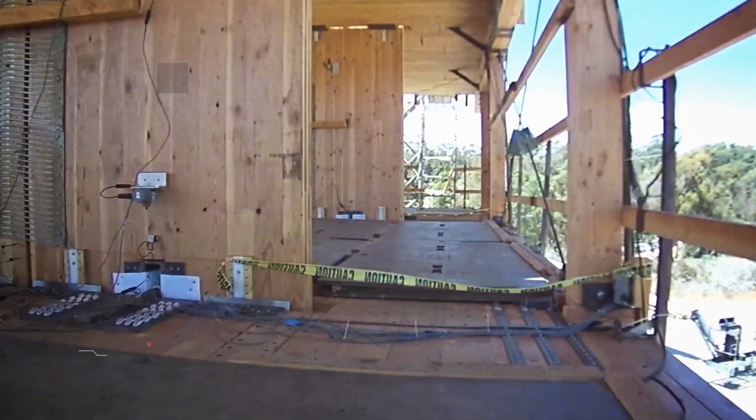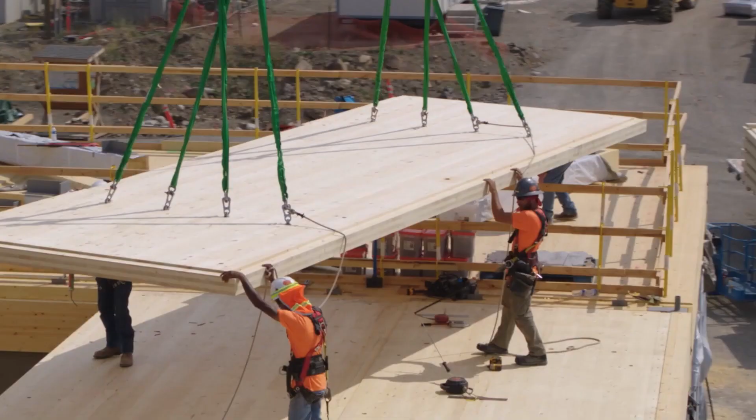Wood is an amazing construction material. It is light and strong and easy to work with. Cross-laminated timber, or CLT, takes these natural advantages and enhances them, allowing us to construct buildings that were traditionally dominated by concrete. And despite some outdated misconceptions about the safety of building with wood, CLT is predictable, safe, and reliable.

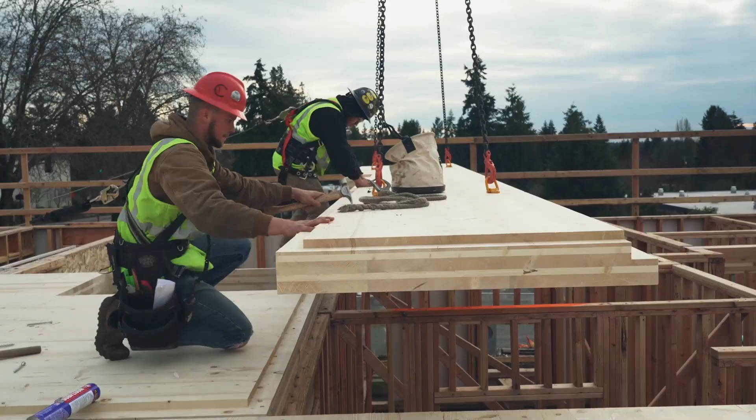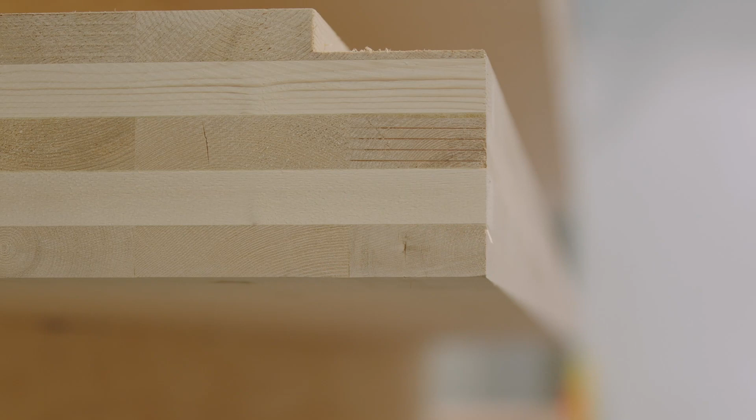It's very simple when you boil it down. We believe that CLT is a better, faster, safer, and even cheaper material to build with when compared to steel or concrete. This is the hottest building material that I've seen in my career, and interest level is off the charts. We're making a big bet on mass timber, but some of our customers are also interested because of the potential for higher ROI due to market positioning, higher lease and rental rates, and so on.

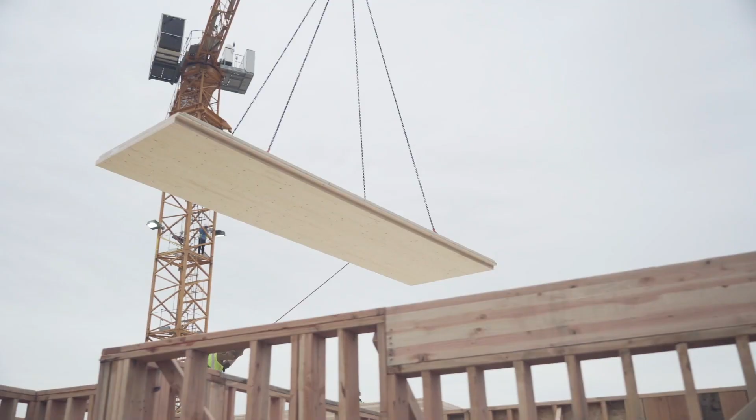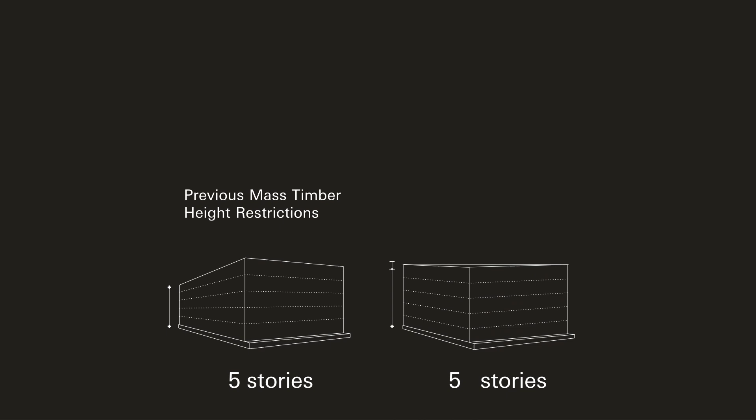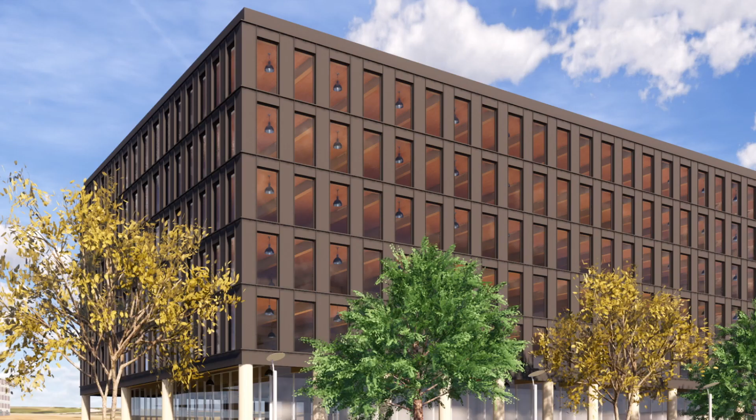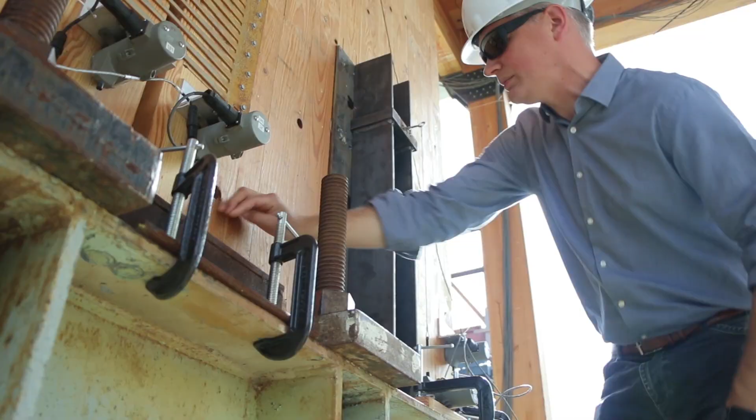CLT has been used in Europe for decades, and it has an established reputation as a sustainable, reliable building material. With the recent ICC building code changes, it means now with mass timber we can build up to 18 stories. We have done an immense amount of testing with the material to certify and ensure it meets the highest safety and performance standards. Katerra's Advanced Materials research team has looked at every aspect of CLT: strength, acoustics, fire rating, vibration, everything possible to make it clear beyond a doubt that we have the technology to deliver high-performing, incredibly safe mass timber buildings.

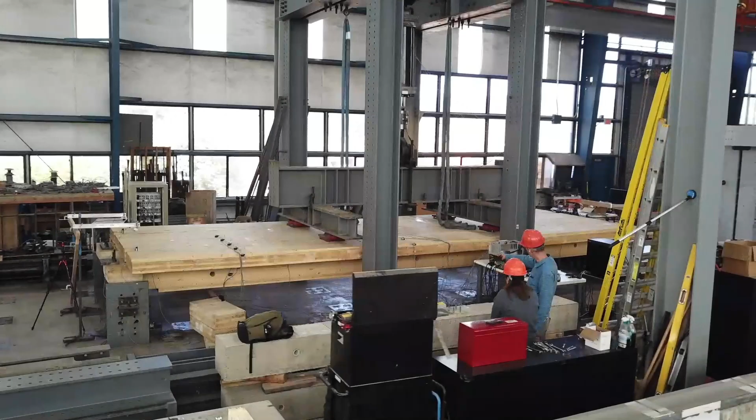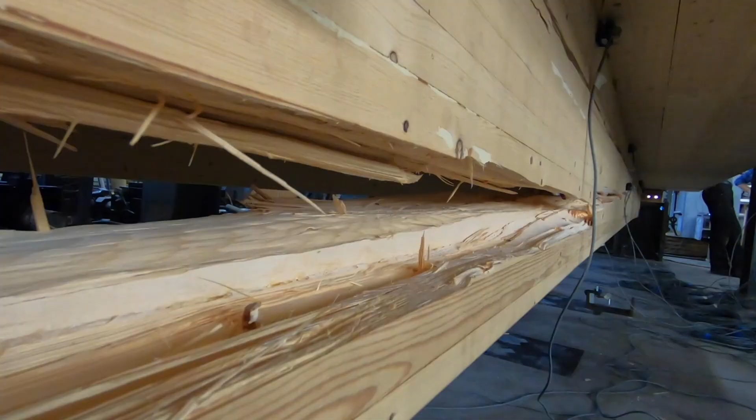In independent laboratory testing, we take samples of our product and replicate the forces they will be subjected to in a real building. So these tests are set up to find those breaking points, and that establishes a point of failure. And then we are able to define a safe working design value that can be used by any structural engineer on any project type.

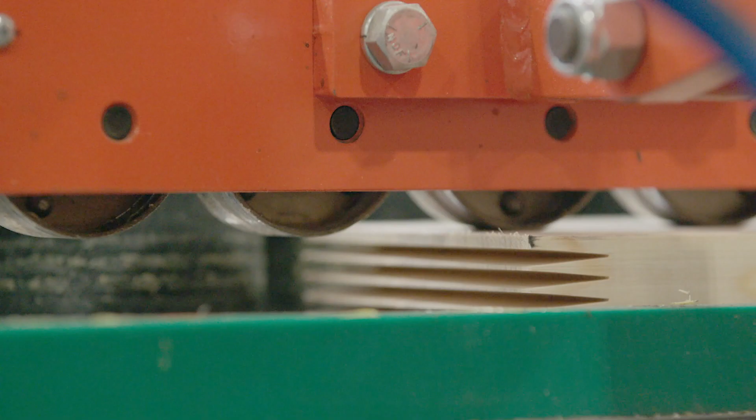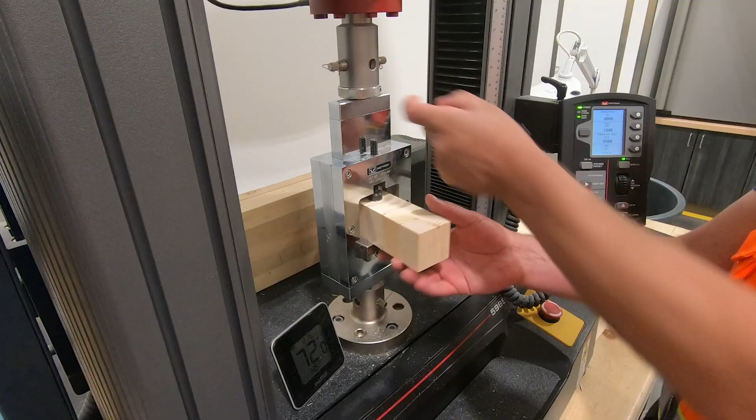Well, the adhesive bond line is critical to the performance of the CLT in general. It's actually the quality of that bond line that ensures the product itself will perform the way that it's anticipated. The shear block test is essentially extracting a cube out of a large panel, looking very closely at the bond line between the layers of wood, and shearing it to ensure that the adhesive, the glue bond, is actually stronger than the surrounding fibers.

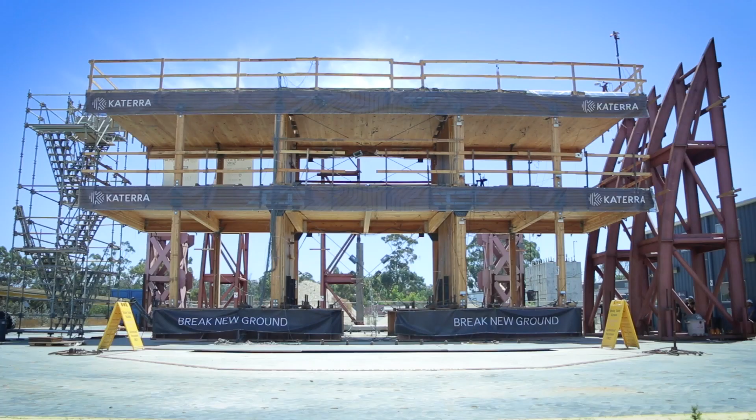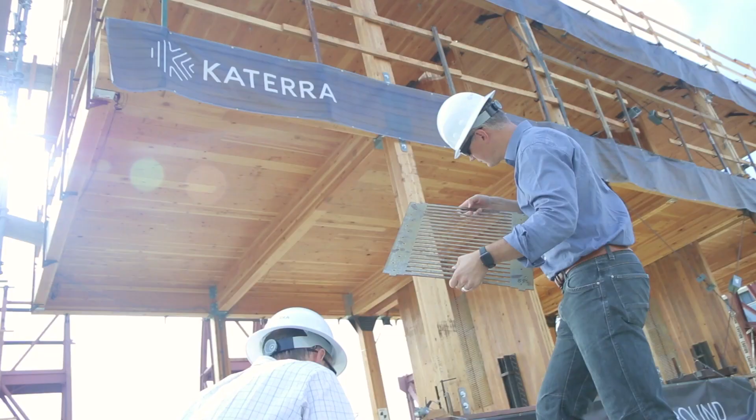During an earthquake, mass timber is the right material for the right place. The fibers adapt to the movement of the earthquake. Unlike concrete or steel that are brittle, they can yield and collapse in an earthquake. CLT won't. Earthquake forces are actually generated by inertial forces that scale with the weight of the building. So a mass timber building with our CLT in it, generally speaking, will be lighter than a comparable concrete building. Therefore, the forces could be lower.

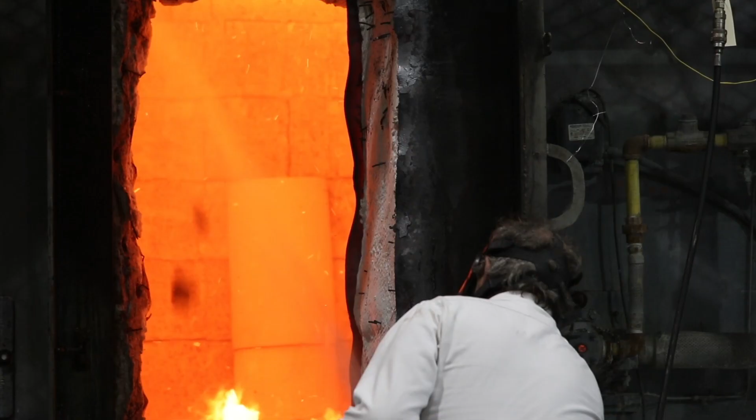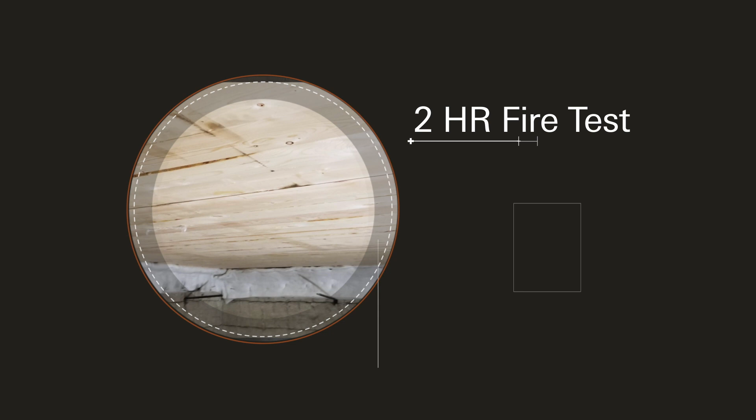In a fire event, mass timber has mass to it that allows it to actually char, and a char layer to maintain protection of the underlying material. In 2019, Katerra successfully tested a 6.3-inch 5-ply CLT panel, a bare panel, to a 2-hour fire rating. And that's a very severe test, a hard test to pass. And that is a test under load.

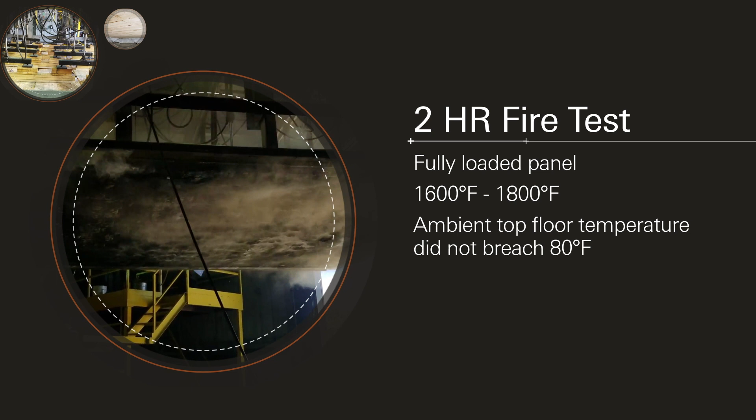So for 2 hours of loading up to a 1600 or 1800 degrees Fahrenheit temperature curve, we were able to maintain the full load of the panel. The floor itself, the structure itself, will not collapse before 2 hours, and egress and first responders can access and put out that fire before 2 hours.

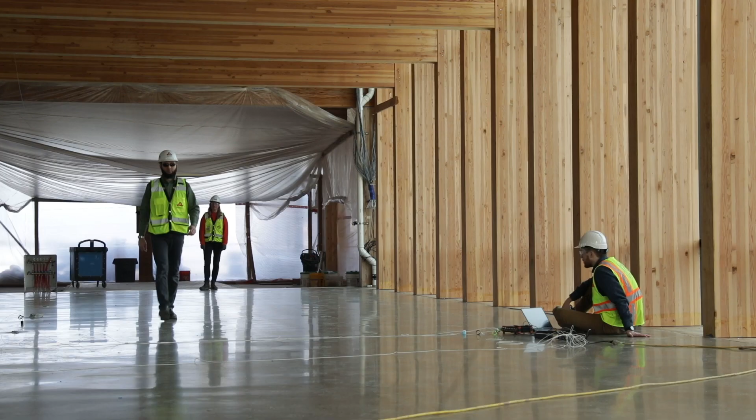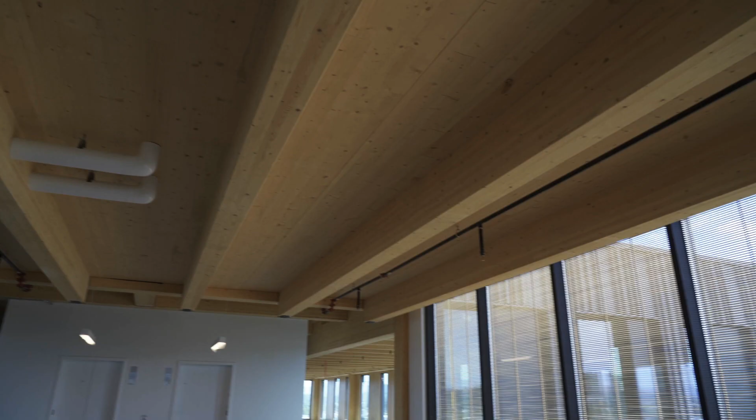The acoustic performance of buildings is critical. It's sometimes not the first thing that's thought about when you think about a new material type. For floor assemblies, the way we have achieved the best acoustic performance while also exposing the wood as an architectural feature in the unit below is to apply a gypcrete topping with an underlayment assembly. My belief, based on the occupants' experience in these buildings, is they perform very well acoustically and even vibrationally, in the bounciness of the floor.

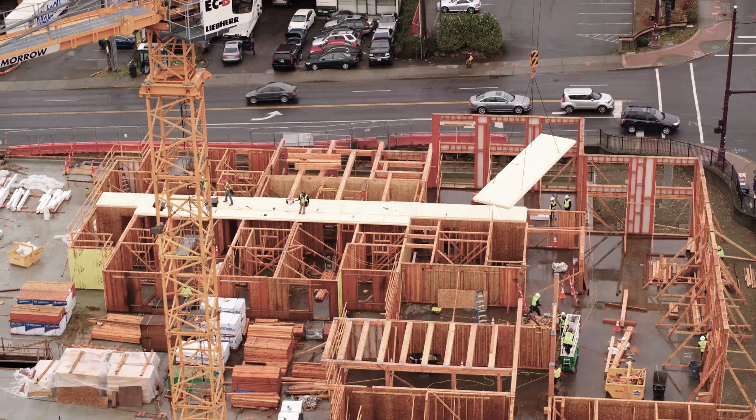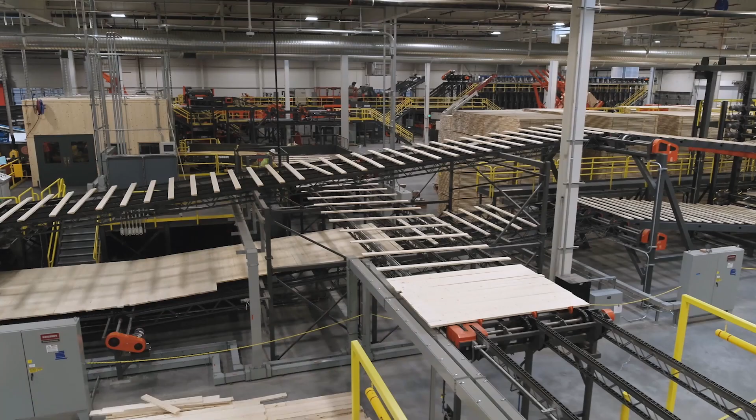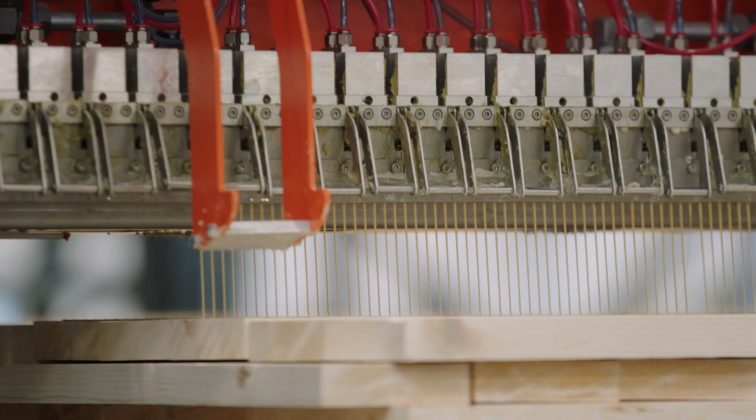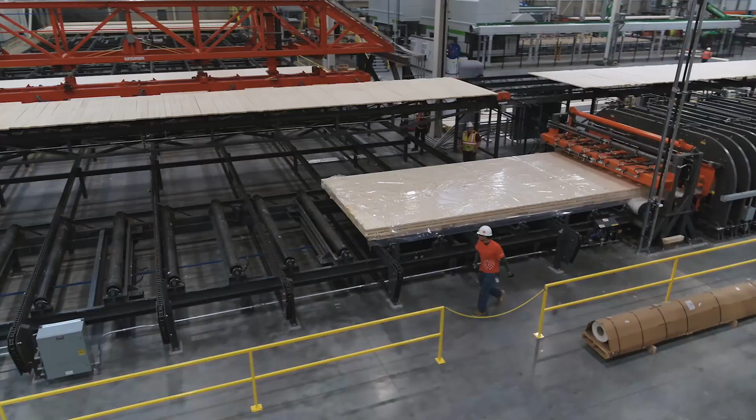What's interesting about wood products, and mass timber products in particular, is they happen to be the perfect material for building in factories. The precision we developed in Katerra's mass timber product extends to our CLT factory. By controlling and manufacturing the mass timber products we've tested, we can ensure a high quality, high performance product with great certainty. Our new facility in Spokane is the world's largest single-use CLT facility. It is fully automated and can produce 3, 5, 7 and 9 ply panels to the North American market.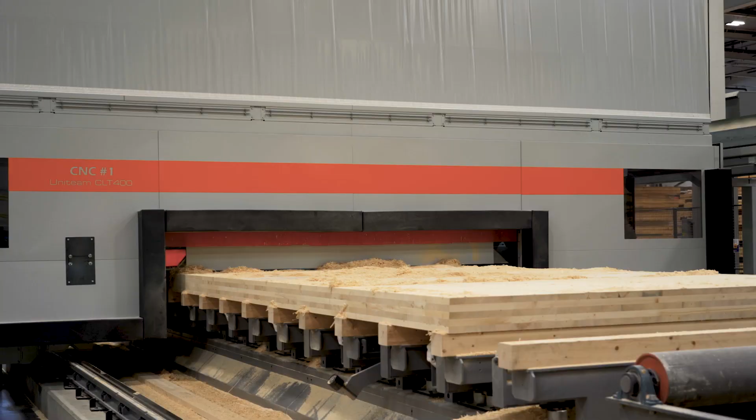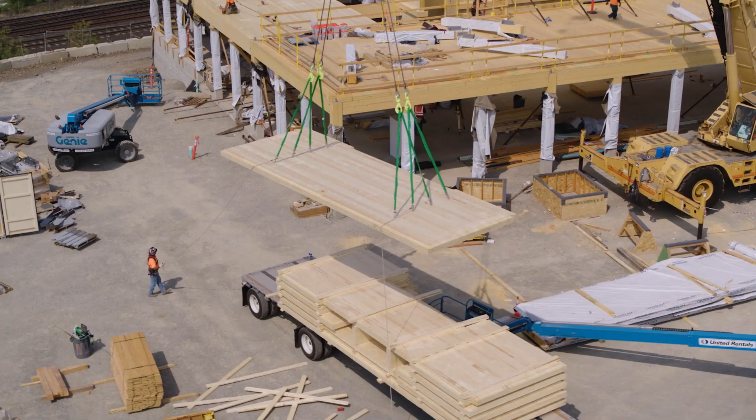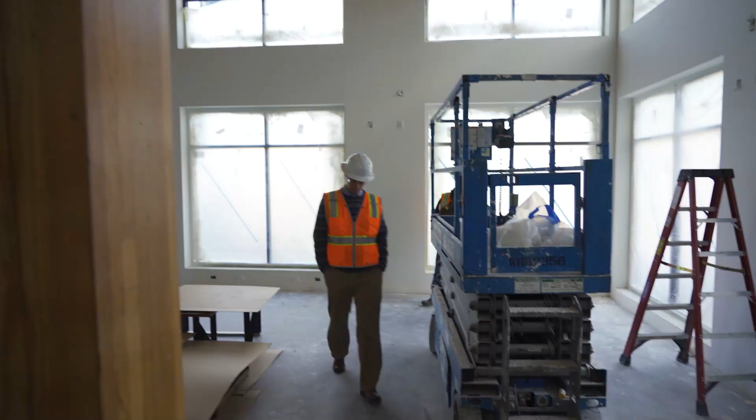Being able to prefabricate CLT by introducing a CNC post-process allows the material to be highly efficient and has zero waste. So when we take each panel to site, it is pre-cut, pre-drilled for assembly without any secondary work required on site. Katerra CLT and mass timber building types give us a great opportunity that brings all the efficiencies we need to reduce costs and build higher quality buildings in North America. Mass timber is good for the occupants, the owners, the industry, and the earth, and it is safe. We had the belief, now we have the data as well.